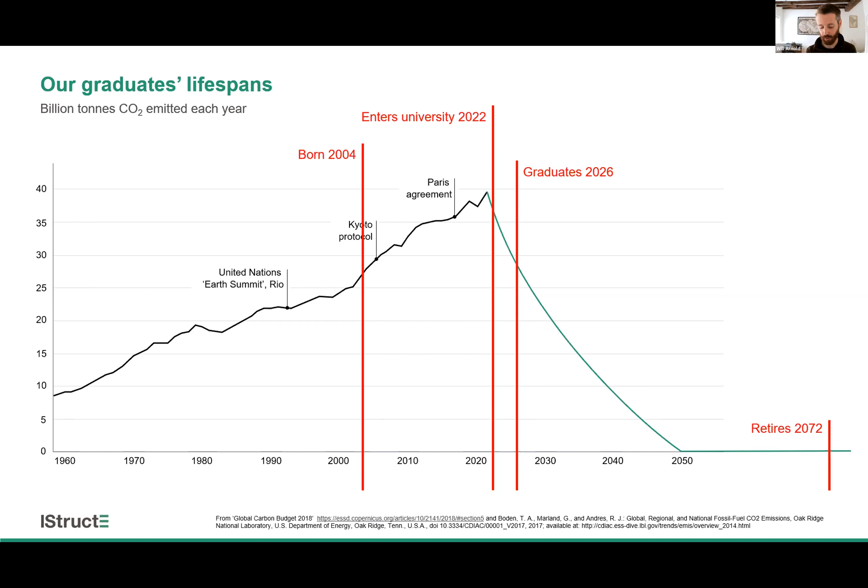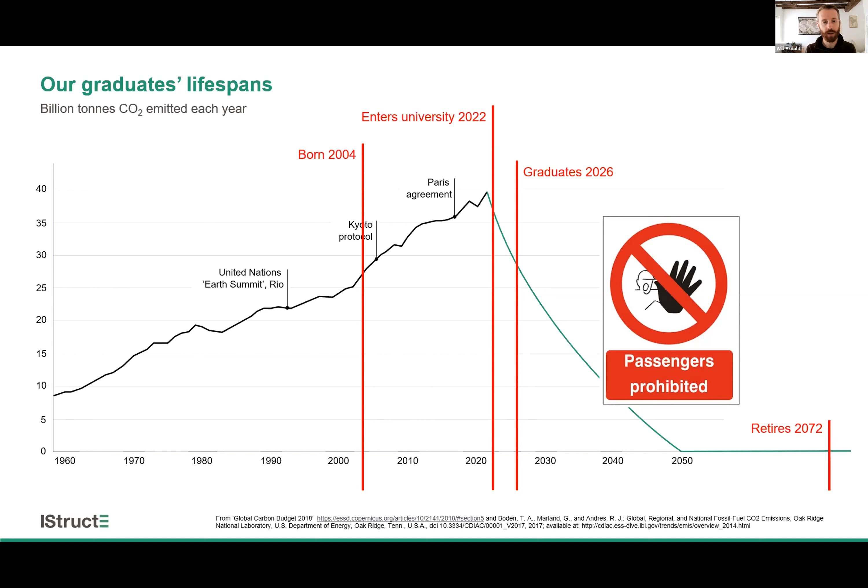The world of work they're going to enter is completely different to what any of us went through, whether we've always worked in academia or have done some time in practice. This is all new. And of course, the point of this is that they need to be a part of this, and they need to be told that they're going to be a part of this. There's no passengers on this train, because otherwise there's no way we're going to get emissions down as quickly as we need to. It requires everyone from graduate up to senior directors to be pushing in the same direction.

In response to all of this, the industry is changing, and it's changing pretty quick. This time last year, I wouldn't have been able to tell you much about what we're doing in terms of entry requirements to the institution. But since then, it's not just the IStructE that's taken a hard look at the chartership requirements, but actually most of the construction industry as a whole. So the CIC, which is a forum for different institutions to speak to each other, led the writing of a climate action plan that's been signed by 30 different institutions. And within that, it includes the requirement to revisit CPD, revisit initial professional development, revisit chartership requirements, and make sure that climate and carbon are at the heart of those things.

I'm quite proud to say that the IStructE has already progressed this quite far. We've had board approval on changes that have been proposed to the chartered exam and to the IPD requirements, and we'll see that coming through from 2023.

And without being able to give you too much detail on it, what I will say is that climate and carbon and reuse, things like this, we all appreciate that they need to be core skills that an engineer has. And so the chartered member requirements are being updated to reflect that these are core skills. These are not a sort of optional extra. So expect to see carbon and climate literacy throughout both the exam and the IPD requirements.

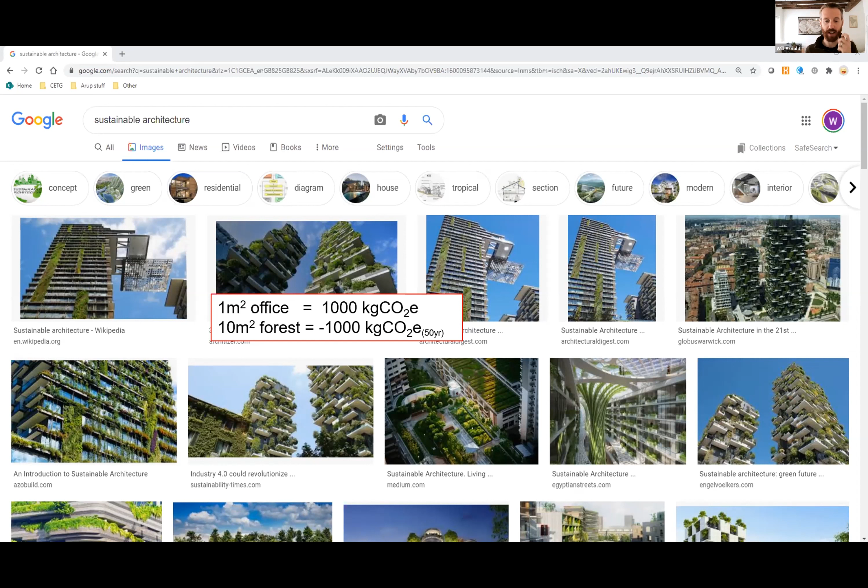And some numbers for you there: if you build 1 square meter of office, you emit a ton of carbon. You need to plant 10 square meters of forest to absorb that carbon back from the atmosphere over 50 years. So to put some greenery on buildings is not going to get us anywhere. And we need our graduates to know this. We need them to be the ones who go out into the world of work and educate others on this, because it's not happening without them.

And again, helping our graduates understand that they are not going mad when they think that this doesn't make sense to them, but actually they're the ones speaking the sensible things. I think it's just worth reassuring them with that sort of stuff.

And again, this is about creating students and creating graduates who have an inquiring, skeptical mind, who will go out there and say, fine, that's great, tell me why, show me the numbers, let me make my own decisions on this, so that they can then go off and design things in a way that is as low carbon as they think they can get it, rather than just being fed information by others.

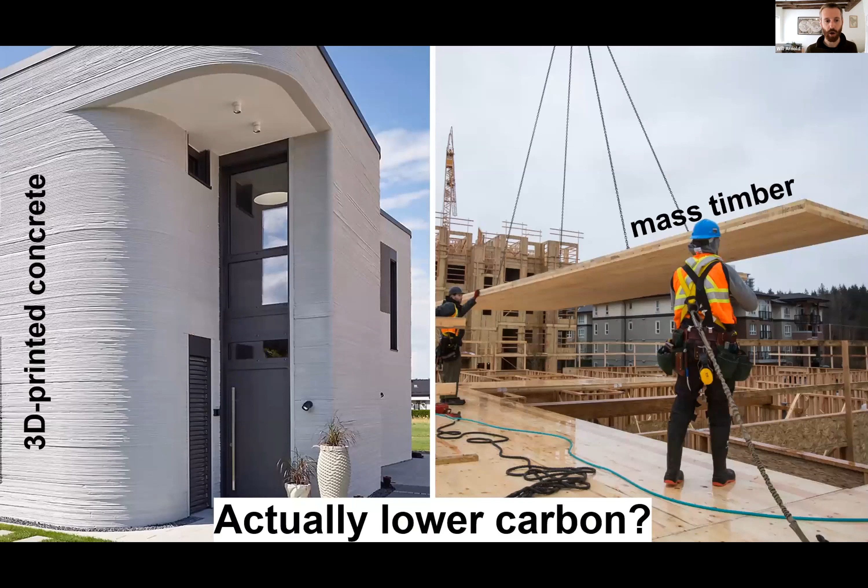They're also going into a world where there's all these fantastic new technological advances left, right, and centre. 3D printed concrete and mass timber are my 2 favourites that come up again and again with people sort of claiming this is going to save everything. But of course, mass timber floors have about 5 to 7 times as much timber in them as timber joists do. And 3D printed concrete, I mean, who the hell needs to make a house out of solid concrete walls? I don't know. Are these actually lower carbon?

Do the numbers, get your students used to doing the numbers, making their own decisions on these things. When is mass timber the right solution? When are joists the right solution? When is concrete the right solution? When is steel the right solution? These are the questions they need to be able to answer themselves.

They also need to be aware, I think, of the differences that happen around the world on this topic. So, I've been working in the UK for a while. And of course, the UK is looking at how we can decarbonize the entire built environment. And there's a whole load of energy going into that, right from policy level down to your grassroots engineers. Other countries are not coming at this quite as quickly or quite in the same way that we are.

And so, the expectations for what a graduate could achieve if they get put on a project that's being built in Oman or China or Venezuela will be different to the expectations of what they could achieve in Norway or Canada or the UK. And that, again, they need to be okay with that. They need to be told, don't worry, you're not going mad. Of course they're going to be different, but then they need to understand the things that they still can achieve and the sort of role that they can play to make things better.

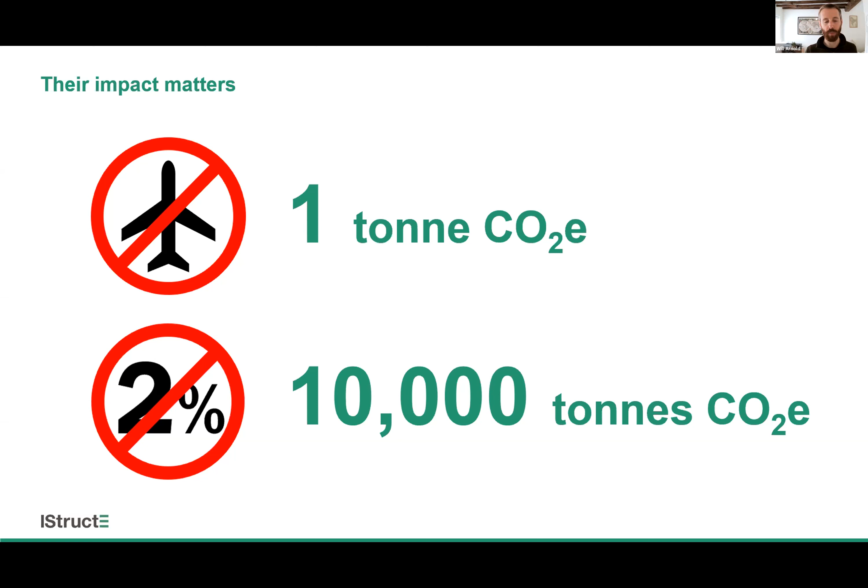They need to understand the role of being a team player. We talked a bit about systems thinking this morning and understanding the holistic design. Of course, embodied carbon is not always the driver of the whole emissions of a building. And in some circumstances, you might even argue that carbon emissions in total are not the main driver of the whole building.

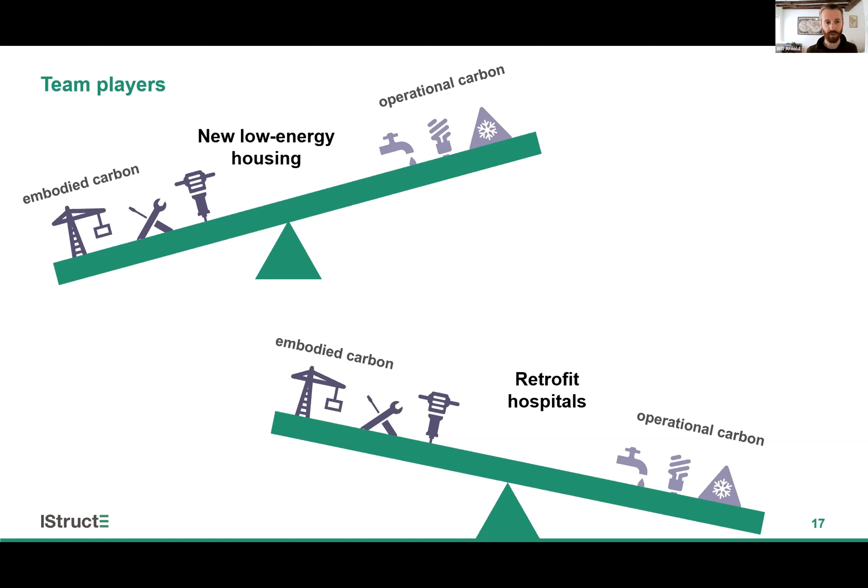There are emergency hospitals being built in parts of the world that are being battered by storms, for example, where you might argue that actually resilience and making sure those hospitals stay open through the next storm is more important, and we can invest more carbon today. But again, it's about your graduates understanding that. It's about them understanding the time implications of these emissions.

So it's about them understanding that emissions on site due to what you build today, whilst it might only be, say, 40% of the total, less than half of the total, in terms of emissions per year, is massive compared to anything else that a building, structure, bridge, whatever is going to see over the rest of its life. And so treat decisions appropriately. The grid is going to continue to decarbonize. That's going to happen everywhere in the world.

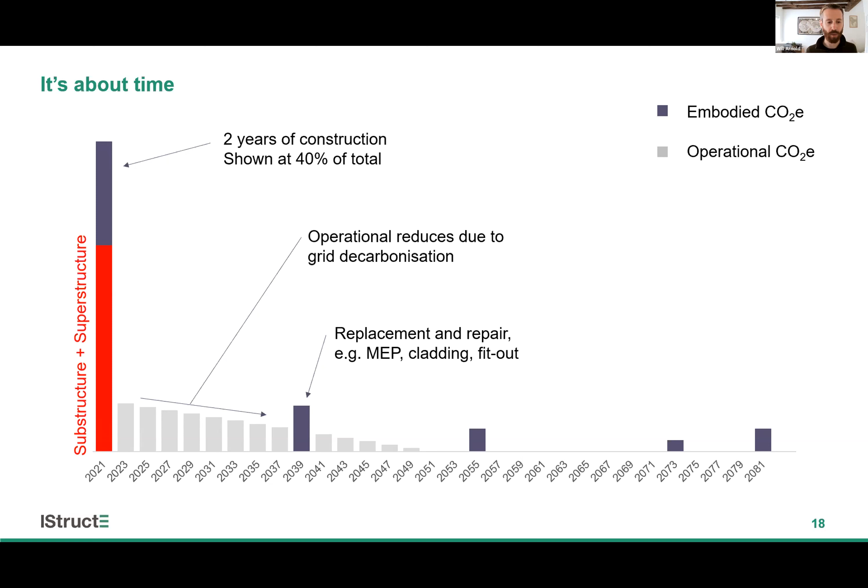The way we build buildings in the first place needs to change as well. And yeah, the red bar on that shows you that the structure is usually sort of 2/3 of that total. So again, really, really big involvement for them. They need to be equipped to deal with all of this. So they need the tools to be able to do this. And this is where the IStructE team has been working tirelessly for the last 18 months. Most of what I've shown you in this presentation is freely available on the website. If you don't know where to go for it, you can drop me an email, I'll show you.

This is a hierarchy that we use when I speak to engineers at all levels about design decisions that they take and designing for, well, this is a sort of net zero triangle on the left, which is why it includes offsetting at the bottom, but designing to minimize carbon and then offsetting the rest. The point I try and remind people of is that you can't usually go back up this triangle very easily once you've started to work your way down it. But those decisions at the top will have the biggest impacts. Decisions at the bottom will generally have a smaller impact.

Now, the fact that specifying low carbon over here comes after use less stuff is quite important. What we're saying here is, you need to teach them that the material they build out of isn't the only job and doesn't solve all the problems. They need to answer all these other questions first, get their emissions down as far as they can, and then make sure that the way they work with the material, where it's specified, cement replacements, sourcing of steel, things like that, that comes afterwards. You can't do this the other way around.

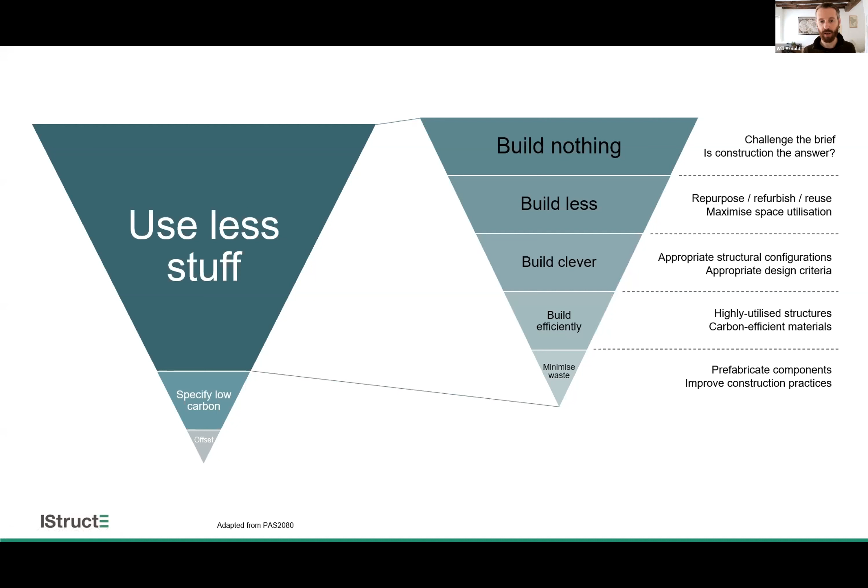Doesn't make sense. And of course, as you all know, there's a bit of a loop back through this sort of stuff, as there is in all design. Once you've decided on a certain material, you might go back and reassess whether or not some of the earlier decisions were the right ones. But it's that way around, it's not the other way around.

You need to make them okay with challenging the brief. I understand that the new JBM requirements for education that are being enforced as of next year are going to require you to teach things like this to your students. How do they meet the client's brief more or less without building what the client's asking for? How do they give them the same outcome without necessarily giving them the output that they imagined in the first place? Which is the big question. But there's plenty of good examples out there.

My favorite anecdote is of the civil engineer who's approached by an airport based in the UK and asked if they would bid on designing another car park for the airport. But actually, when they dug into why they're asking for this car park, together with the client they realized that what they really needed to do was reshuffle some of their flights, because they were overfilling the car park once a day, every day, and with a slightly better timetable of flights landing, which could be achieved without sending planes a long way around, they could completely eliminate the need for a new car park. There are ways to do this.

The problem is engineers are not being taught that it's within their gift to stand up and ask these questions. So that's something that they need to be given.

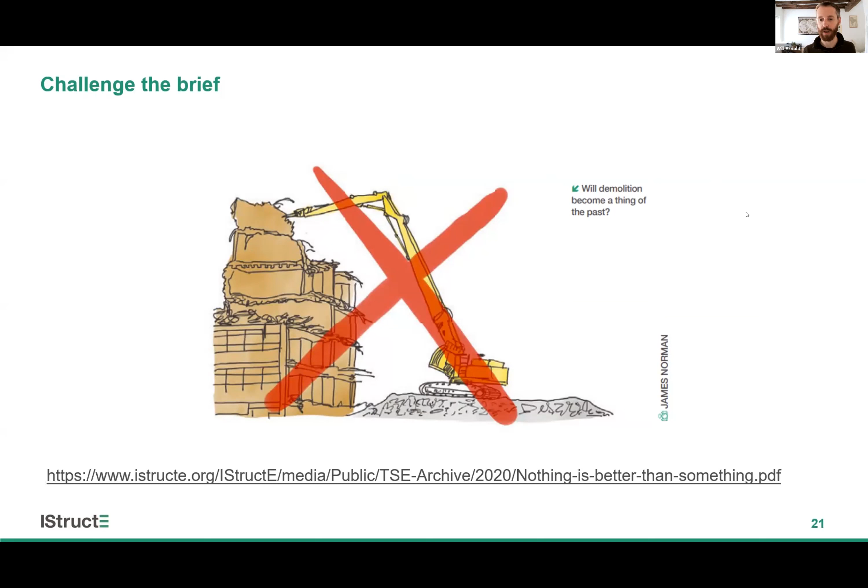They need to be taught that reuse is going to be the starting point for everything they do. If we think back to that graph where I showed you that the second half of their career is going to be zero carbon, that means they're almost certainly going to be working in a circular economy world for the second half of their career, if not before. That means when they design a new hospital building, because they're designing something in a region that doesn't have a hospital, they're going to be trying to work out how to build it out of pieces of material that have been taken out of other projects.

And if they don't have it, if they're being taught in Steel Structures 101 that the first thing they need to do is design a scheme and then work out how big the beams need to be, then they're being taught backwards. That's the way we were teaching 10 years ago. It's not the way you should be teaching now. It should be, here's a palette of materials that are available to you. What could you design from it? What scheme would you come up with for those pieces?

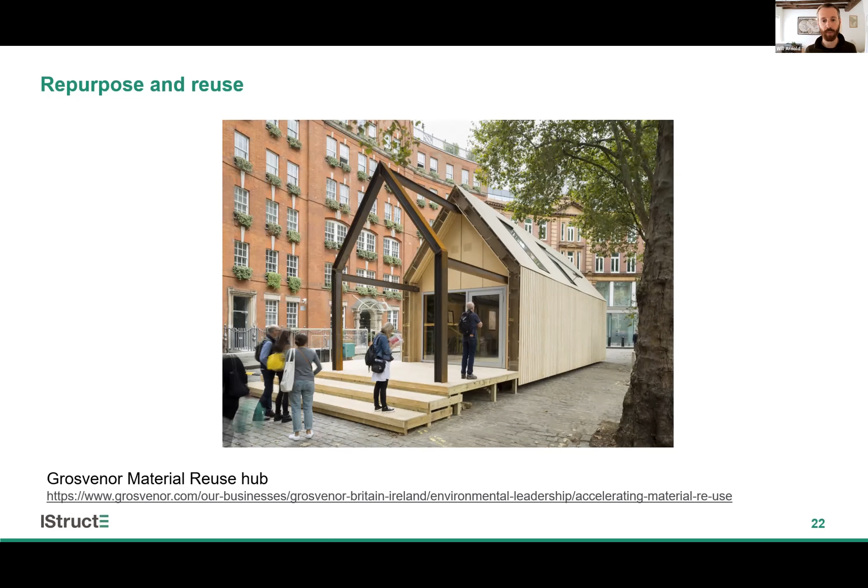And then they need to be taught about the power of getting the structural configuration or the structural diagram correct. These are two towers on the screen, both designed by the same firm. One designed in London, where there's no real wind and there's definitely no earthquakes of any significance. And the one on the right is in Taipei, Taiwan, which has some of the highest wind and seismic loadings in the world. They have more or less the same amount of steel per square meter in both of those buildings. And the reason why is because on the right, the brief that the architect set to the engineer was to say, what is the lightest steel tonnage you could possibly get me? What's the best configuration for my building? And everything was driven around that.

Now, that was done for reasons of cost at the time, and couldn't be done for the tower on the left because of things like sight lines and the like. But the point is, you can achieve so much more if structure is driven first, and helping them understand the importance of that gives them a sort of skill that they can turn up with some confidence when they turn up to work and be able to say, well, hang on, if we did it better like this, wouldn't that make a difference?

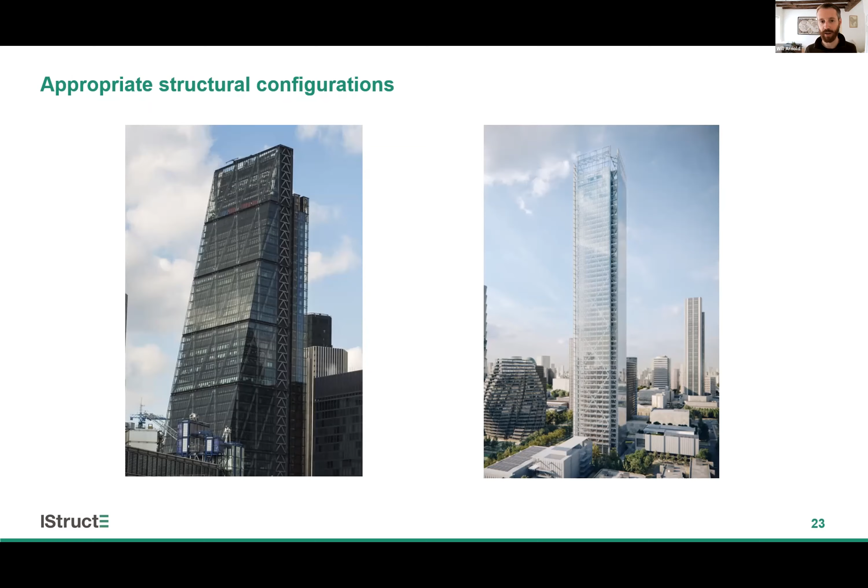Obviously, you've all talked about loading before, so we don't need to go into it again. But if they're not aware what 5 kPa looks like, please make sure they're aware of what 5 kPa looks like so that they can tell people how bonkers they're being when they ask for it.

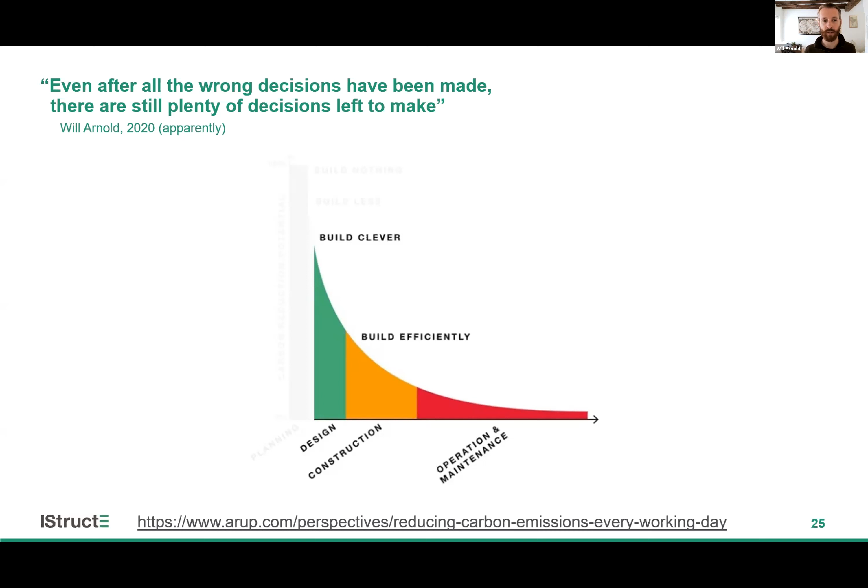And then they need reassuring that, of course, when you take that triangle from the start that's got your build nothing, build less, build clever hierarchy on it, even if the first decisions that were made were the wrong decisions, e.g. let's build a 42-story tower in a highly seismic, typhoony region of the world, there's still loads of other decisions to make. So build clever. How do we lay out the structure in the best way possible, efficiently? Can we design it to 99% utilization? And can we be okay with not having that sleep at night factor that so many of us are used to designing with?

They also need to be aware, of course, that this is all part of a bigger, knotty, far more complicated picture. You cannot solve carbon if you don't solve equality, if you don't solve biodiversity, if you don't solve freedom of speech. These things do go together, and the more you read about it, the more obvious it becomes.

Make them aware of this, yes, but also just reassure them they don't have to tackle all of it at once. This is about picking and identifying the areas they can have the most involvement with and striving to do the best they can in that area, knowing that others will take care of the rest.

Last but not least, because I'm aware that we're a couple of minutes into questions, I just wanted to touch on the students that you might have who maybe don't want to leave and go off to design buildings for a living or design bridges for a living, but actually they want to stay in academia, because frankly, we're going to need quite a lot of that as well. And helping them understand the role they're going to have to play is just as important. So I'm going to do this with a graph, because if there's one thing I remember from academia, it was that graphs and equations are king.

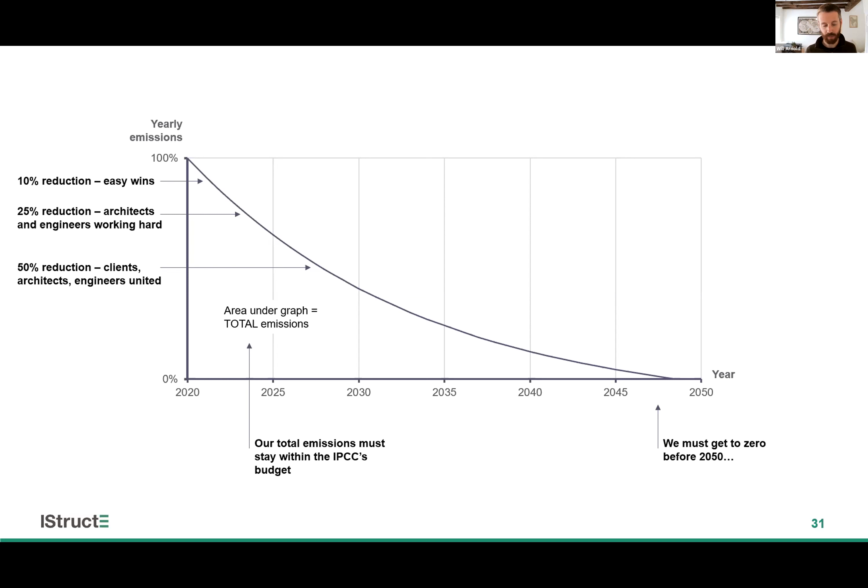To get to 50% is really hard though. 50% based against business as usual at the moment. You need clients who are demanding better and architects and engineers who are united in delivering it. And you need them to drive each other again and again. That, I think, is about as far as we can get with what we currently know about, which means that there's a sort of line across this graph. And above that line is a design challenge, and below it is a research challenge.

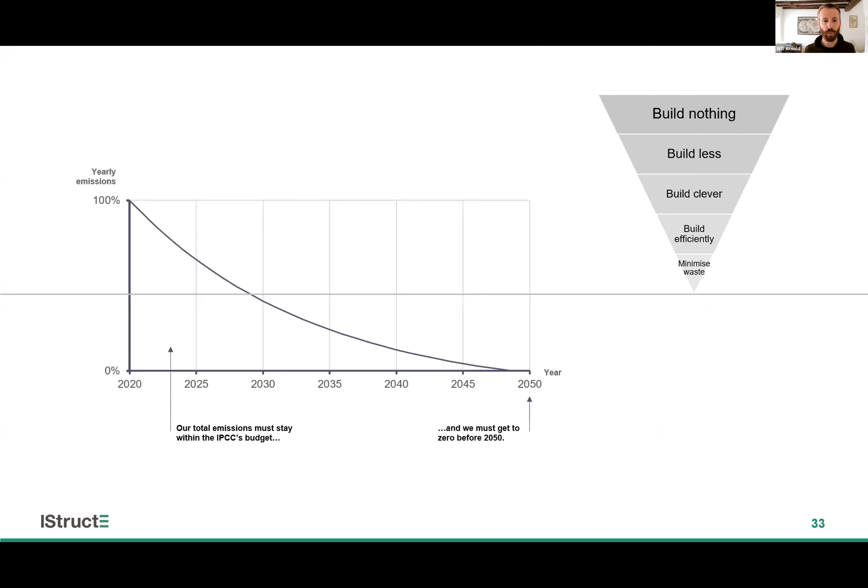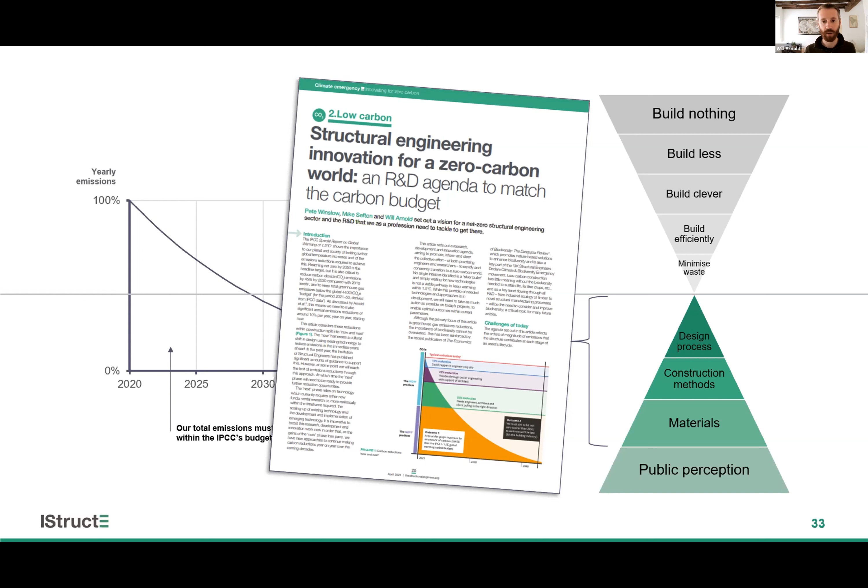We published a paper in the magazine late last year, and you'll find it on our website under topic 6, Get Involved, which lays out a whole load of R&D objectives to match the carbon budget. Do please have a look at it, because there's a huge amount of work that needs to be done around design, construction, materials, public perception. And if those things aren't ready until 2030 for mainstream engineering, then the design world will have tapered out its efforts by then. That stuff needs to be ready now. It needs to be tested out on small projects in the next few years and scaled up over the few years after. So there's a lot of work to do on that.

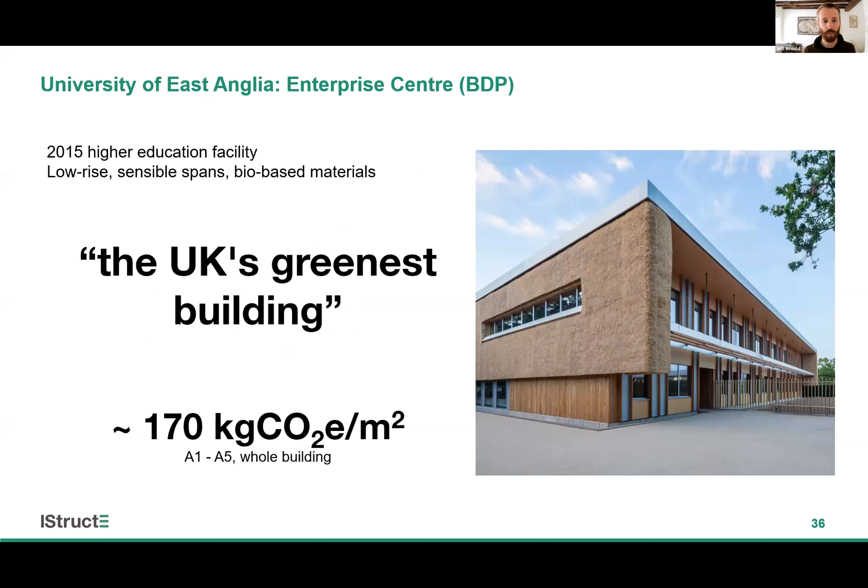I don't have time to go through the Give 'em Hope slides. So needless to say, if you go back through this slideshow afterwards, there's some good example projects on here that you can give to your students to reassure them that they can do all this stuff if they try. But I won't go through them now because we don't have time. And there's also some links to some good viewing over the COP season.